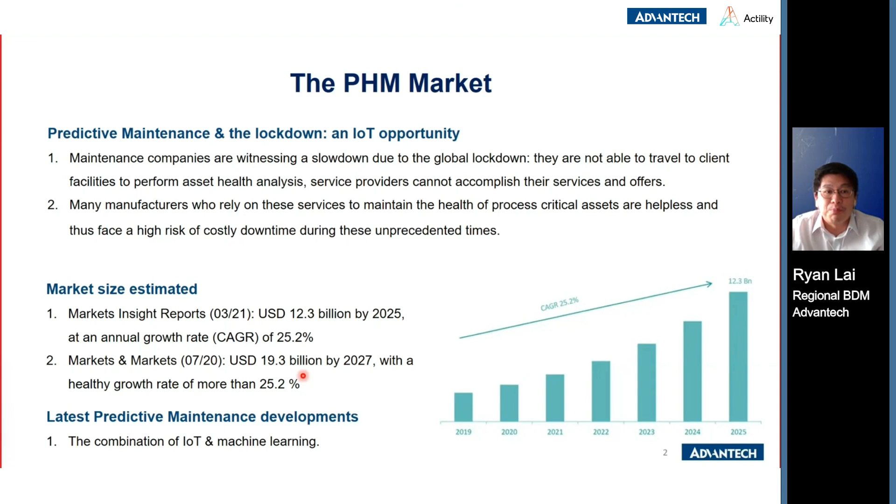If you look at the traditional method of maintenance in the past, a lot of manufacturing owners, how they do maintenance is by schedule, every month they will go down to their equipment to check, or they will go by their run hours, to see whether the equipment has hit their run hour and it's time to maintain. An older method is they just max out their equipment until it shuts down, and only then will they do the maintenance. So those are very traditional methods to do maintenance.

But in the digital factory world, or in the IR 4.0 world, we have transformed the way of maintenance. For example, we can help remote monitor the machines and manage the management tasks. We can put the IoT sensor in play, and then do some analytics to tell, hey, it's time to do maintenance.

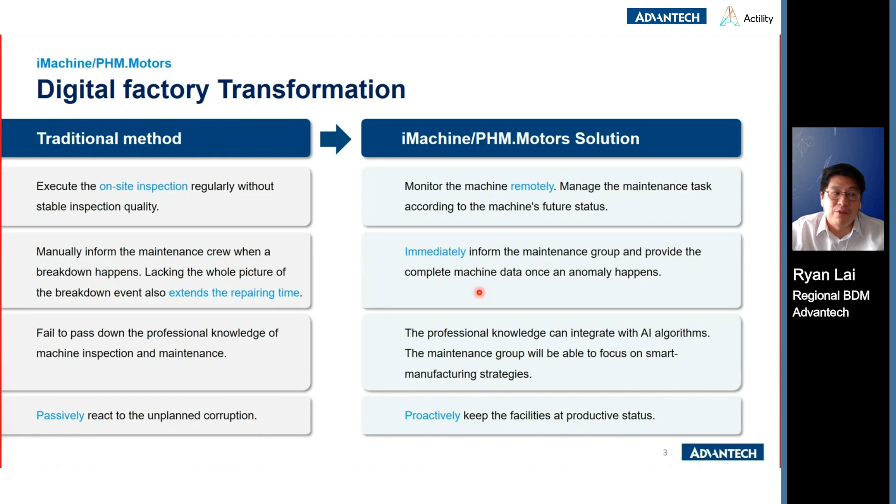And also, because we are using wireless sensors and everyone has mobile phones, they can immediately get alerts if the machines are going to be down, or high level alerts. So with some visualizations of data, and with the help of data analytics, the maintenance guys will be able to see what's wrong with the machines. Is it a wear and tear situation? Do we need to replace parts? So with this information, they can quickly take action to reduce the downtime for production.

Let's look into the types of maintenance. As I mentioned earlier, Deloitte has set out three types of maintenance: reactive, which in the past meant they just max out the equipment, letting it run until it dies off, then they change the whole part. So the challenge is you will damage the whole equipment, then you have unforeseen downtime and a higher maintenance cost.

As for planned maintenance, we call it scheduled maintenance, for example every two weeks or every month we do the maintenance. But what are the challenges? There will be increased replacement costs over time, you need to prepare additional spare parts on hand, and you will have a lot of scheduling to do the maintenance. As your equipment increases, your plan time has to increase as well.

And the last one is proactive. So today's webinar, we're going to talk more about the proactive type of maintenance, which means it will be ongoing maintenance, it will be monitoring. So in proactive maintenance, we talk more about preventive measures.

Instead of just preventive maintenance, let's talk about predictive maintenance. With AI technology, we are able to let the user know that this equipment is going to go down soon, so you need to take action. The software also has the capability to tell you it's going to go down soon, and this is the latest scheduled maintenance you need to do. So those are the things it's able to do for proactive types of maintenance.

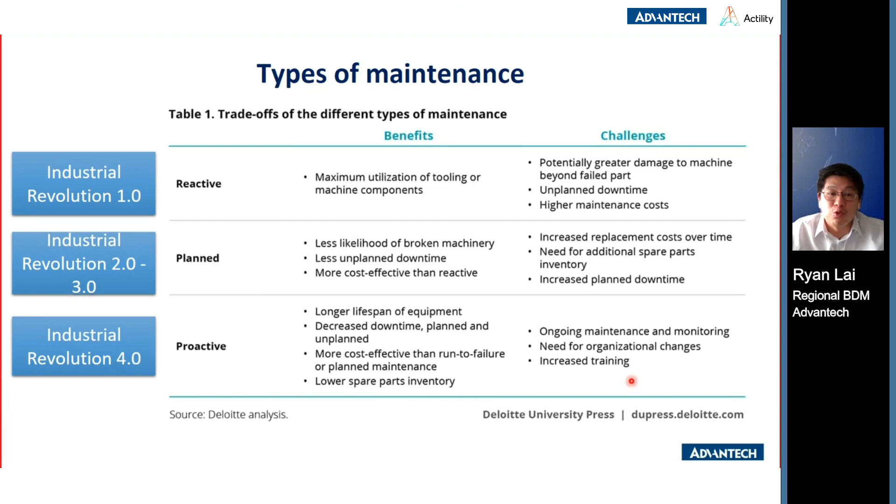So why has predictive maintenance become more and more popular and in demand? It's because it's able to help reduce the cost of unplanned downtime, and also help reduce the needed manpower to oversee the equipment. So most companies that have implemented predictive maintenance foresee decreased cost and decreased downtime for maintenance scheduling. So the maintenance department has played a role from a financial point of view already.

So those are the benefits of predictive maintenance. I believe most of the audience here today really understand the importance of predictive maintenance. So now I will change to the next speaker to explain more of what we are providing today. Back to you, Joel. So next up we have Yijhen, who will be sharing with you the predictive maintenance solution.

To you now, Yijhen. Okay, hello everyone, I'm Yijhen from Advantech, and today I'm going to introduce the intelligent predictive maintenance solution for rotating machinery. First, I want to introduce the whole structure of the solution Advantech provides. Advantech provides a total solution from edge to cloud, supporting our users in realizing equipment management, remote management, and also station operation.

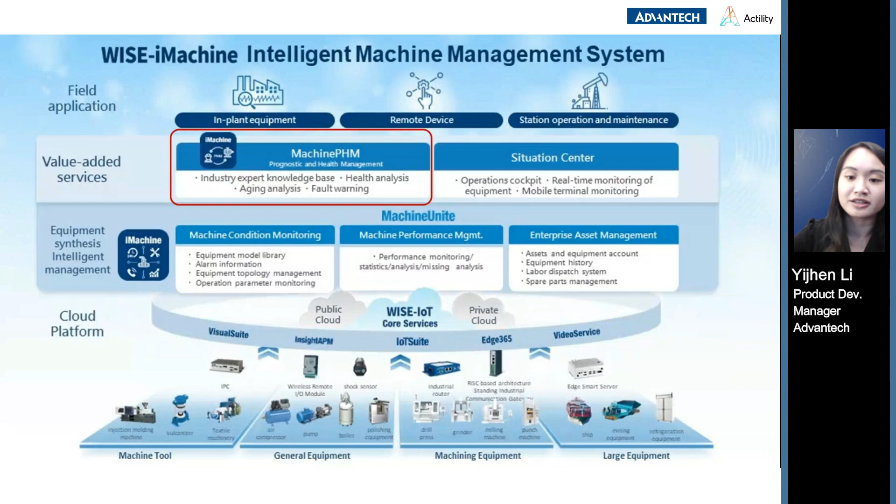Today we're going to focus on the PHM part, which is an AI-based solution analyzing machine health status according to industry experts' knowledge. In brief, I will introduce the iMachine PHM solution as a total solution focused on rotor predictive maintenance.

We provide real-time and also next 7-day prediction of the machine health index. The index includes the ISO 10816 standard and also the degrading level. As a result, the inference result may be used as a critical reference for resource allocation, and we can finally enable proactive, data-driven management strategy.

In this case, we can deliver these functions for you, including multi-sensor management, vibration data monitoring, the rotor's health index which includes both ISO standards and the degrading level. And we can also provide anomaly inspection and data visualization, and we also support cloud synchronization for your further usage.

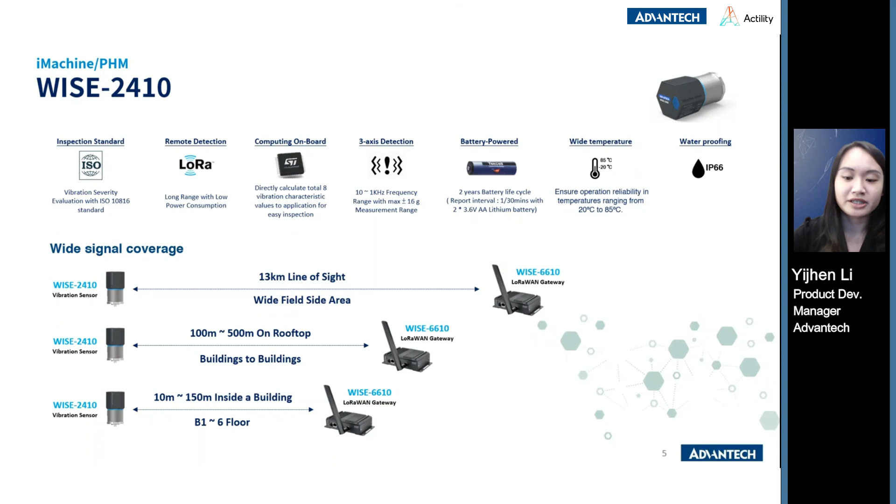So why are we using vibration signals? Because vibration signals can reflect about 60% of common machine faults, for example, machine unbalance, misalignment, or gear wearing issues. The vibration signal is also a leading indicator for predictive maintenance reference. Electricity and temperature signals can also be introduced to refine the monitoring results afterward.

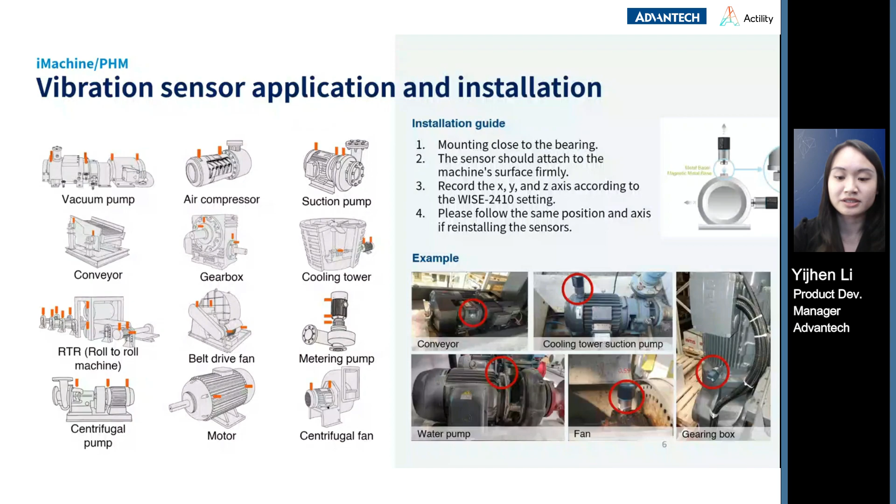Then the PHM module will be able to develop precise analysis results according to the vibration features.

So what is the data transformation structure for iMachine PHM? As I said before, the sensor will be responsible for vibration data collection, and all the signals will be calculated into 8 vibration features over 3 axes. Combining with the temperature data, we transfer the 25 feature values to the edge computing server through the LoRaWAN gateway. At the edge computing server, we provide 3 main functions: data cleaning, model training, and AI inference.

As the server receives all the feature data from the gateway, the data cleaning task can work automatically with standardized data input. Moreover, the PHM model does not need fault data to establish a new AI model for each machine. We only need the healthy vibration data from the target machine to refine the pre-trained, installed model. So our users can expect the inference result in about 2 weeks after system implementation.

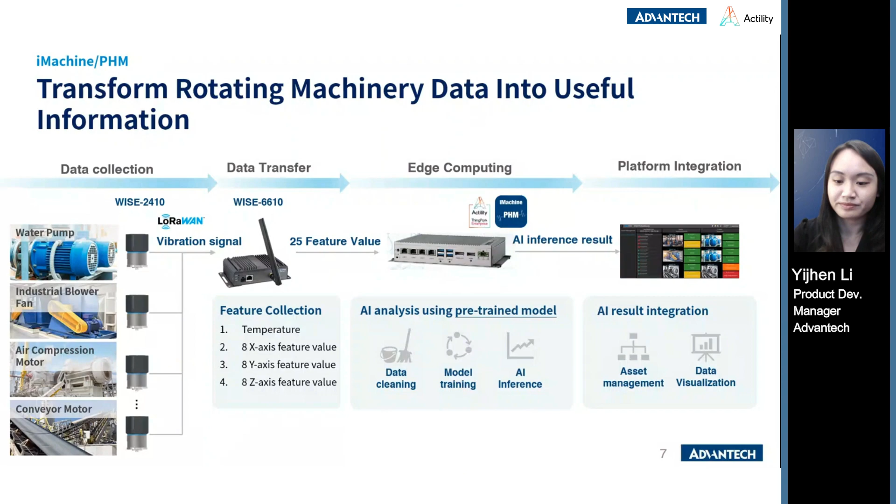And based on this, this is why we can claim Advantech PHM solution as a ready-to-go AI solution. If you have any further usage, we also support platform integration and data visualization to meet your managing requirements.

So how does the model work? Users of iMachine PHM solutions can depend on the healthy index to manage their machines. But what is the healthy index? The first index is the ISO 10816. This is the global standard for machine vibration signal monitoring. According to the index, the motor status will be identified as good, satisfactory, unsatisfactory, and unacceptable.

The criteria depend on the machine size. So in this case, the inferred machine status can appropriately reflect the real situation of the machine.

The second index is the degrading level. The degrading level is the AI index defined as the machinery operating status compared with the healthy machine. The degrading level could distinguish the machine into healthy, light degrading, medium degrading, and high degrading levels. We also have a suggested threshold setting, which is from 0 to 4. However, managers can set their own range to fit the maintenance strategy.

Let me explain more about how you can use this index. The index could be applied to improve maintenance efficiency. For example, critical usage machines should undergo an inspection at a light degrading level to prevent serious damage. On the other hand, we can ignore non-critical facilities unless they reach a high degrading level. So in this case, we can make good use of the resources.

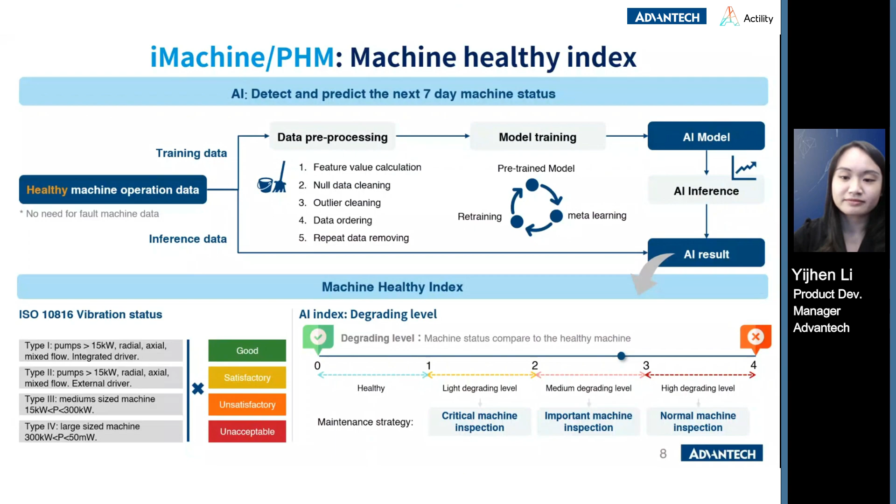This slide is talking about real cases. Our real cases cover plants like petrochemical plants, PCB plants, semiconductor manufacturing plants, steel plants, and others. The model has been verified over machines like pumps used in the production line, air extractors, air compressors, and so on, meeting the different requirements from different plants.

We recommend that some factories are very suitable for introducing the PHM solution. For example, factories with old machines, or where the inspection scenario is quite complex, especially if you have a lot of new employees and are facing many different types of machines, then you can really consider the PHM solution.

Managers responsible for the continuous production line can also benefit from the PHM solution, because they can save a lot of time from long-term machine monitoring work.

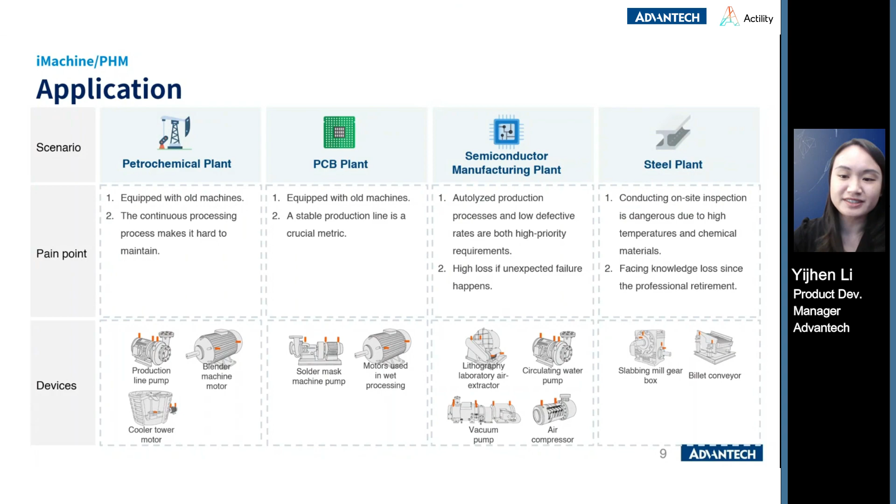So this is the dashboard we provide. The first one is the overall machine status dashboard. The dashboard will update every 10 minutes as a default value, but you can set your own refreshing time. The user can adjust the update frequency according to their own requirements.

As you can see, on the left-hand side is the warning event for risk management reference. It will monitor all the machine fault events. And all the motor indexes are also presented on the right-hand side, including the healthy index, and we present the machine level in different colors too. So this design helps managers quickly focus on the really critical issues.

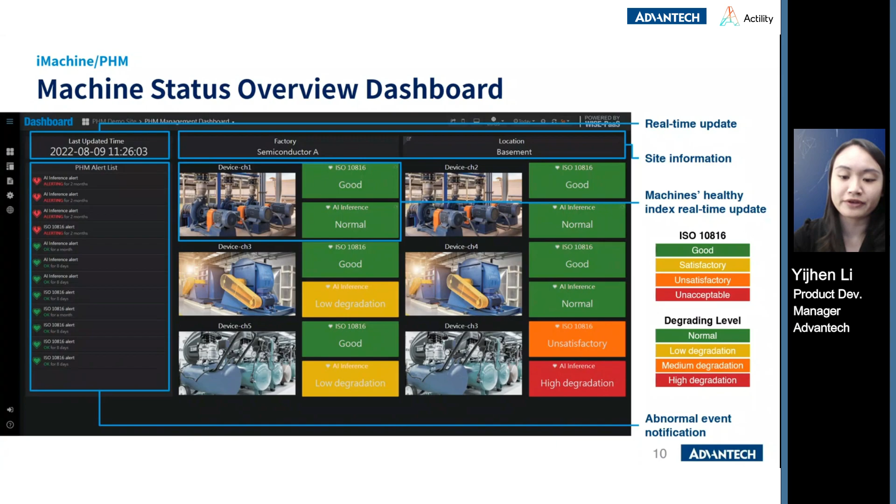And this is the machine status dashboard that focuses on one machine, so the manager can refer to the details according to this dashboard.

Here we can see the real-time machine status, which updates every 10 minutes. For users not familiar with the meaning of the index, we provide a relative chart to illustrate the real situation of the machine on the left-hand side. The manager can find the last 24 hours trend chart for both the ISO standards and the degrading level index.

This enables the manager to understand if there are any emergency issues that need to be handled. After the inspection, the maintenance result could also be reflected for the manager's reference on the trend chart. While allocating resources, managers must consider the index prediction results for the next 7 days, presented on the right-hand side.

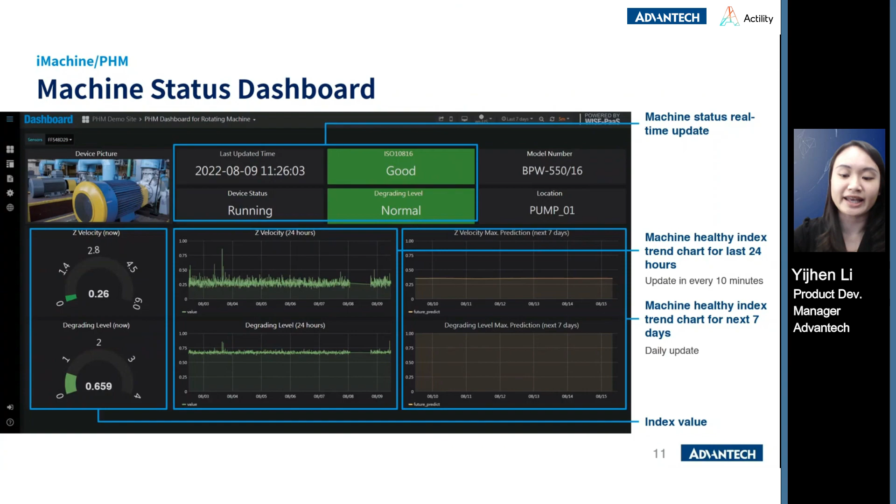One successful case happened in a steel plant, where the manager was suffering from high costs to the production line caused by unexpected machine failure. The factory implemented the PHM solution to keep the production line stable, and also wanted to extend the usable phase of the expensive machines.

Through the PHM solution, our users can overview all machines at one stop and set their own index threshold according to their management strategy. The system also enables experts to conduct diagnosis remotely according to the historical and future index data.

Our system also notifies managers to immediately handle situations if something goes wrong. As a result, we successfully limited the need for on-site inspection. According to the PHM system, the maintenance crew only needs to conduct 2 inspection tasks over 10 months.

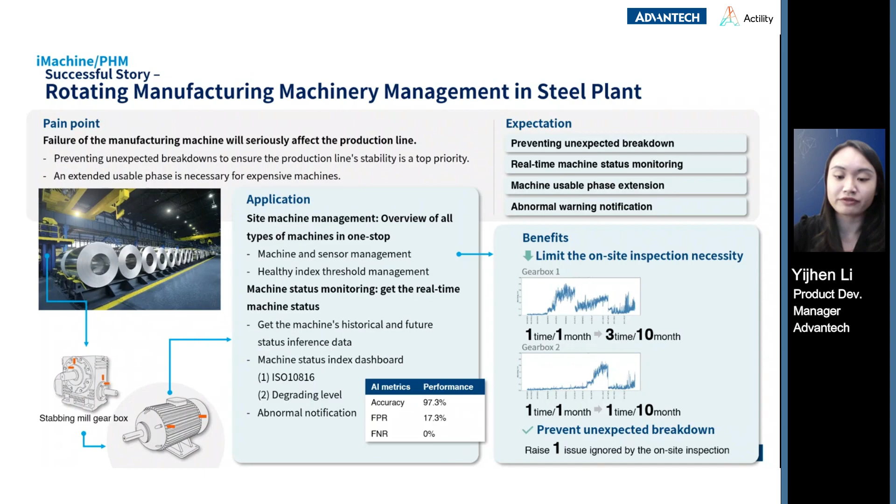Another case happened in a semiconductor manufacturing plant. In this plant, having a machine fail can cause a great deal of loss because of the stable quality demand and the high value of the products.

The machine maintenance crews really struggled to ensure the production line works continuously, which means long time monitoring and precise inspection for the crew member.

In this case, we also successfully reduced the inspection times. And we found out that at the end of this project, the AI metrics had really good performance, with accuracy at about 97%.

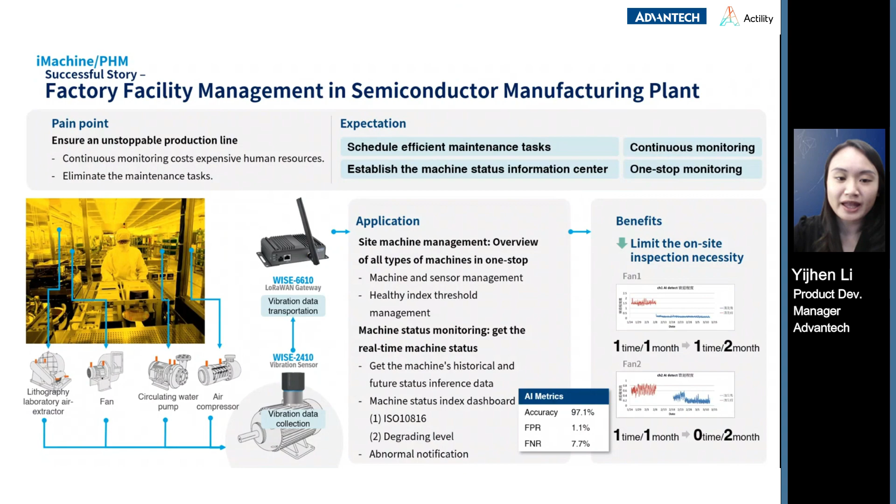So why use iMachine PHM solutions? One of the advantages is we are using an unsupervised AI algorithm, which is based on healthy vibration data from the target machines.

So we don't need to collect fault data, we only need to use healthy data, which can be collected within 2 weeks. So within 2 weeks, our users can expect results.

Our users also benefit from the hardware and software integrated package, using this package they can skip the long process of feasibility studies.

According to our success stories, you can tell that our model has really good performance and reaches high accuracy, so this is a reliable system for managers to manage all their machines.

The last but also important point is that the PHM solution supports model retraining. Once the physical environment changes around the sensors or the machines, the manager can refine the model without support from the product team. This gives the manager flexibility to manage their own system.

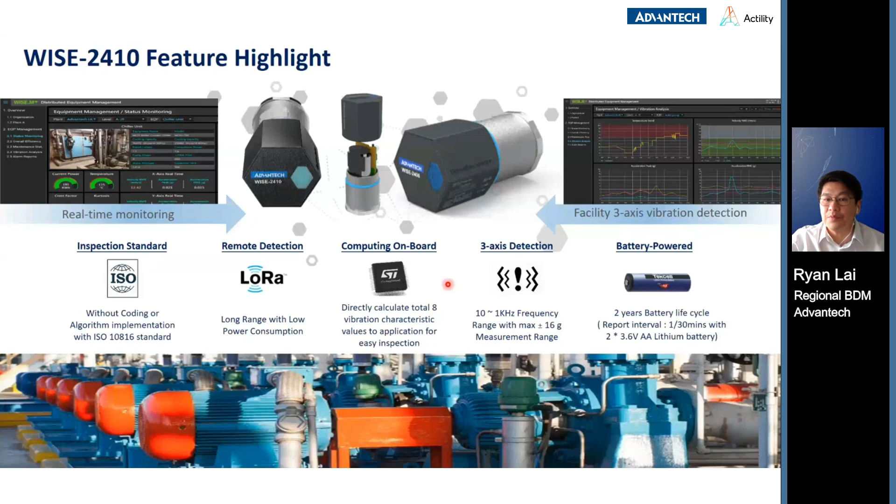So as mentioned earlier, we are following the ISO standard 10816-3, which has 4 types of classes. It depends how big your motors are, and that will determine whether conditions are good, unacceptable, or satisfactory. This ISO standard clarifies the wattage for the motors to determine the class, and we support all 4 classes.

In our sensor, we give 24 parameters. We don't give the FFT value directly; instead we give the calculated value, such as the velocity, the accelerations, the XYZ, the kurtosis value, the crest factor, and the deviation standard values as well.

To explain how our sensor works: our sensor will be in deep sleep mode to conserve energy when it's not sending data. Once it's awake, we analyze the sampling data. Our sampling rate is about 6,600 Hertz, so the sensor takes about 4,000-plus sample data points for the FFT value. From the FFT value, we calculate and produce the domain value, then come out with the calculation feature.

All these parameters will be given through the gateway, so all this data will be updated. As shown in one of the earlier slides, this sensor supports approximately a maximum of 13 kilometers in line of sight. We also support, in some scenarios, 100 to 500 meters depending on how your installation works. For inside a building, we can support up to 10 to 150 meters.

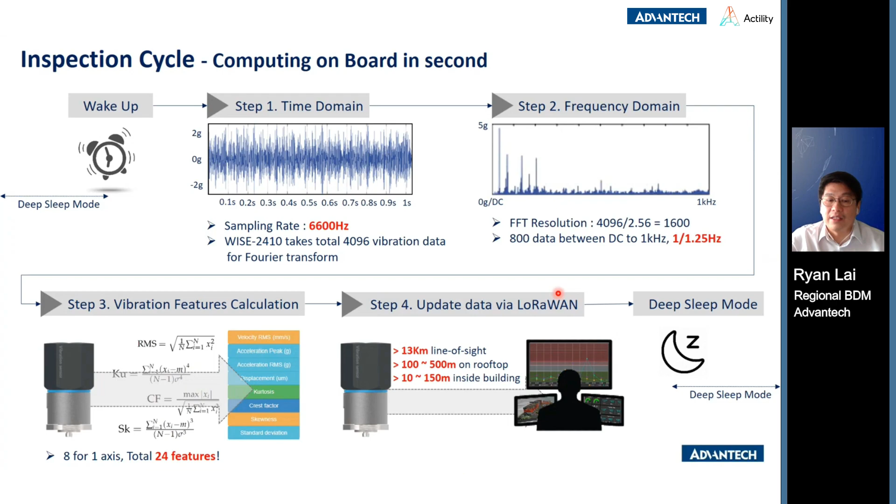Once all these steps are done, it goes back to sleep mode to conserve energy and battery usage. Depending on the interval you send and the bandwidth you use in the LoRa bandwidth, the battery life can last at least 2 years.

Now let's go for the type of installation. For this sensor, we have 3 types of installation mode. For the standard package, we give you the stud mount, which is the screw type. You can also have an optional type, which is the magnetic base, meaning there's no need to drill any hole on the motor—just connect it to the magnetic base and plug it onto the motor.

We did receive some feedback asking whether this magnetic base is strong enough to hold when your motor is moving. We can assure you this magnet is really, really strong—you need at least 2 hands and strong force to remove the sensor. The last option is the adhesive metal base, which is the stick-on motor type. Our sensor is suitable to install either vertically or horizontally.

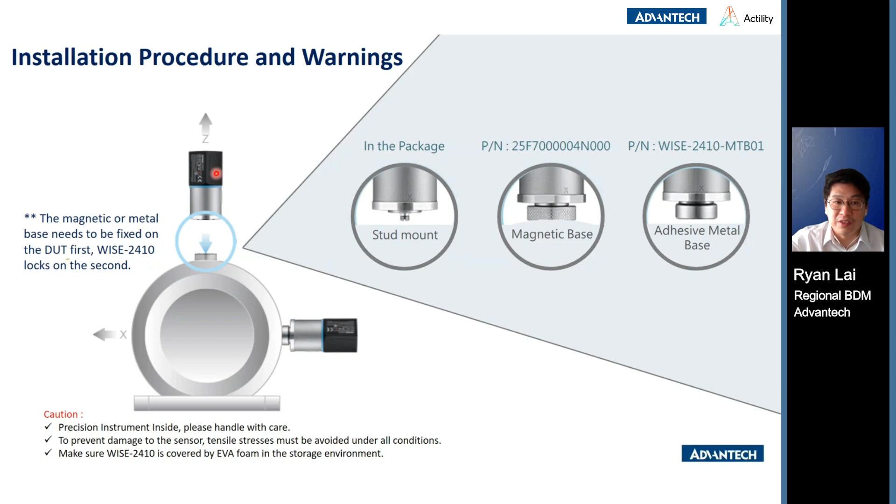One new product we have just launched is the explosion-proof LoRaWAN sensor. So for those with projects in oil and gas, a very sensitive area where you need to be in a C1, D2 area or ATEX 2 area, our sensor is suitable to apply in those zones.

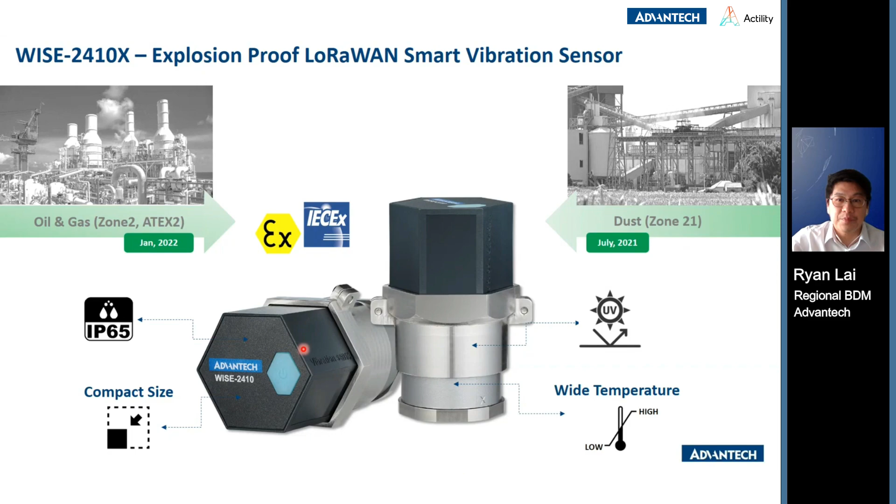Now we'll touch a little on Actility, the LoRaWAN network server. Actility's network server is very strong in its services—they can connect to multiple different sensor types. We work with Actility, with Advantech as our hardware, and can connect directly into their network. One good thing about the Actility LoRa network server is they can manage over 2,000 units of sensors without worrying whether it can sustain so many sensor units.

You can do real-time monitoring. Actility also provides data and device management, so you can see whether it's connected to the sensor, the battery level, and so on. Actility works together with Advantech, and we provide the PHM, the AI analytic vibration software, as well.

To give you a view of how it looks, the Actility software is pretty straightforward—you just go to the list, select the model Advantech sensor, and immediately it gets connected. These items are on the cloud portion, on the SaaS. We also work with Actility to have on-premise versions, because we understand some projects are very sensitive and cannot go to the cloud, so they need to be on-prem. We do have versions for on-premise kits as well.

Okay, so this will be the end of my presentation, Joel.